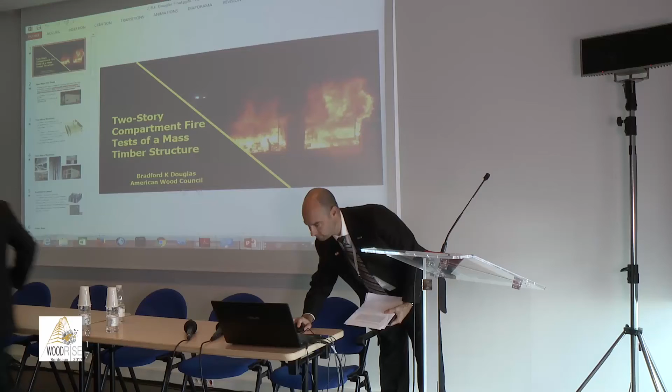So our next presenter will be Brad Douglas from the American Wood Council. Brad is Vice President of Engineering for the American Wood Council, which is the voice of North American wood products manufacturing, representing over 75% of the industry that employs over 400,000 men and women in the United States.

With more than 33 years of experience in the wood product industry, he directs a program aimed at developing state-of-the-art engineering data, technology and standards on structural wood products, systems, and assemblies for use by design professionals and building officials that assure safe and efficient wood-based designs.

He served on several standard development committees of organizations including ASTM, American Society of Civil Engineers, the U.S. Federal Emergency Management Agency Building Seismic Safety Council, and the International Code Council, addressing proper design of wood buildings for exposure to fire and structural loading, including wind and seismic loads.

Mr. Douglas was the 2015 recipient of the Award of Merit and title of Fellow from ASTM International Committee D07 on Wood, which is the highest organizational recognition for individual contribution to standards activity.

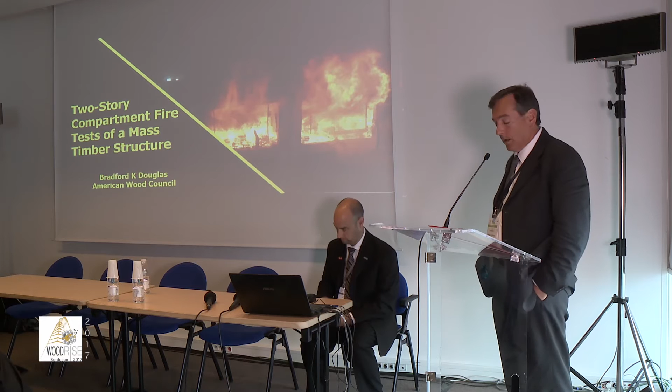So, Christian asked me to come and speak to you today about a study that we have been conducting. It's actually the second study of two full compartment test series that have been done in the United States. The study is in support of the tall wood activities in the United States.

Specifically, I think Jennifer addressed some of it this morning, the International Code Council's Tall Wood Ad Hoc Committee, which is a group of regulators, fire officials, material interests, engineers, architects, and designers who have come together to try to develop prescriptive code changes that will allow wood frame construction up to 18 stories.

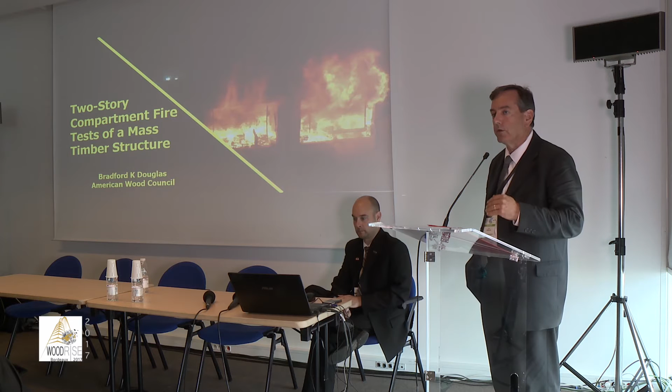And when I say wood frame, we're talking about heavy construction, what we have coined the term mass timber construction. So we're really talking about construction 7 stories and up.

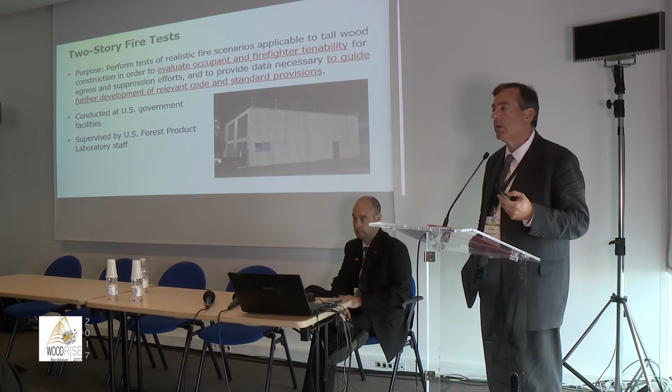The topic today is, as I said, the second series of compartment tests. They are based on a real fire scenario. We basically supplied the contents in an apartment size building, and met the requirements for a real fire scenario that has been identified in some of the standardization efforts in Europe and the United States.

The purpose of this test is a little different than the earlier series. The purpose of this test is really to evaluate the occupant and the firefighter tenability of the compartment during a real fire. Can they get out of the building? What is the timing? Does the fire grow and spread beyond the room and then the compartment of initial exposure?

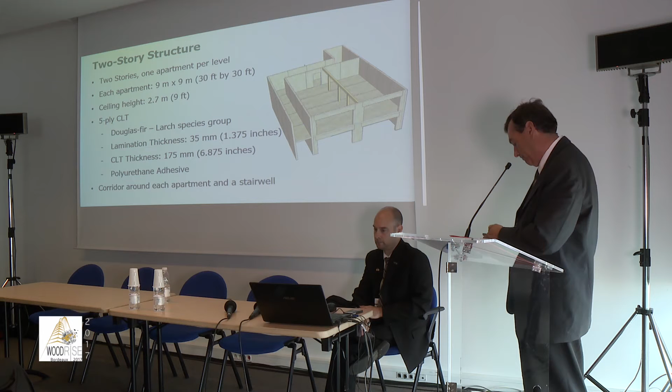So a quick description. This is a 2-story structure that was tested. It's basically, see if I can work this, it's basically identical top and bottom. This is the rough floor plan. It's a 30 by 30 foot, 9 by 9 meter space. It's separated with a load-bearing beam on both floors, CLT in the exterior perimeter, CLT floors and roof, then a non-rated partition in the middle.

The CLT was a 5-ply CLT, made of Douglas fir, 35 millimeter layers, 175 millimeter total thickness. Used a polyurethane adhesive, which is common in North America. And there was also a corridor constructed with CLT around the compartment, and there were measurements taken to determine what, if any, fire spread occurred in this corridor and then down. This is a stairwell here. I think I've got a little better picture of that in a minute.

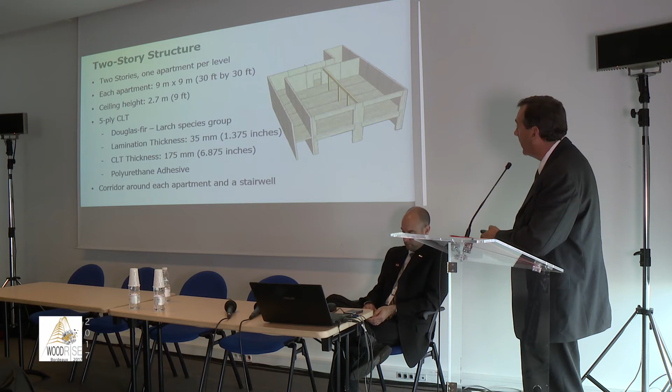There were several things that we noted in the early series of tests that we wanted to address in this series. One of them was the importance of sealing joints. We had quite a few problems in the original compartment test with not having the joints sealed. And so the contractors that put the building together did a very good job putting down joint sealing and intumescent caulk that allowed it to seal up, and we were able to use this facility for multiple tests.

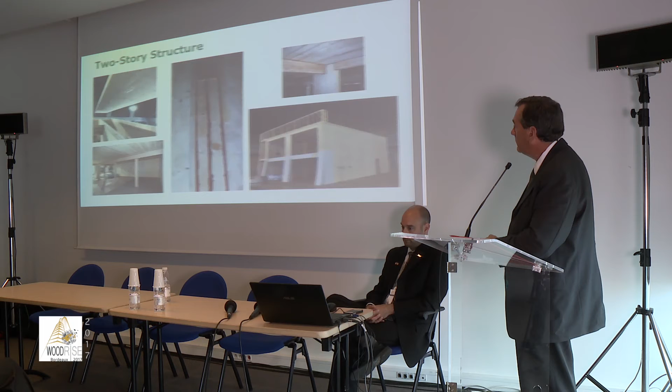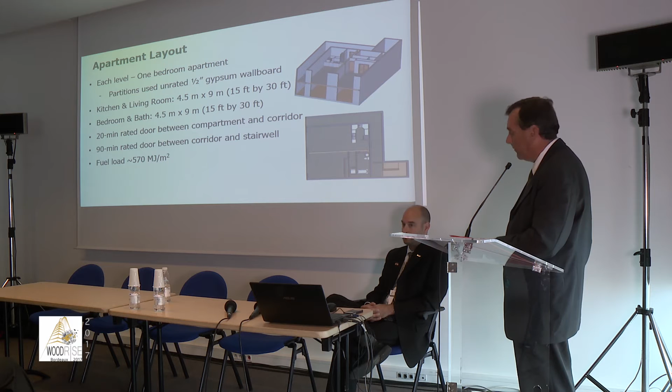This is another layout with the dimensions. The one thing I'll point out, this was a 20-minute door by code. Had to be rated for 20 minutes. This was a 1.5 hour rated door, 90-minute door, also required by code.

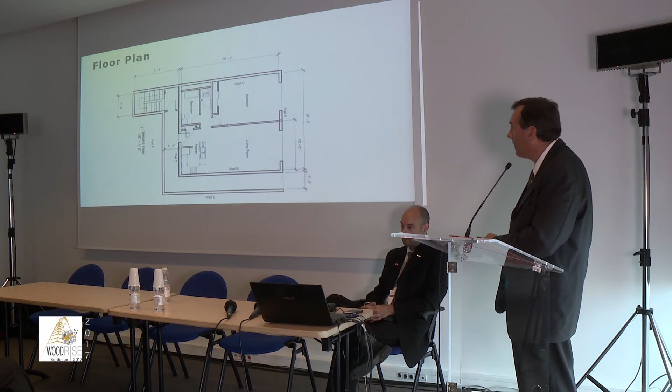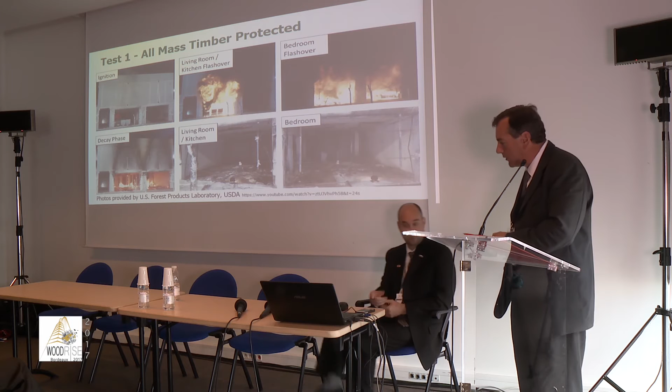So the first test was, again, the benchmark test that occurred on the first floor. And I've got a video here, if I can get Christian to start it for me. There's a lot going on in this video, but all of these cameras are linked, so it's all occurring at the same time from different camera locations. You'll notice down here in the bottom, they'll speed it up and slow it down so that we're not sitting here for the full 3 hours that this test was taken. But they've ignited the source back here in the kitchen.

The kitchen becomes involved and it moves into the living room. I believe we're fairly close to flashover in the living room there. So we've had flashover in the living room. It's now spread into the bedroom. You can see the fire here coming through the doorway. This door was left open just to accelerate the time in which the fire spreads into the bedroom. Mattress ignited, so we have flashover in the bedroom. Both rooms are fully involved at this point.

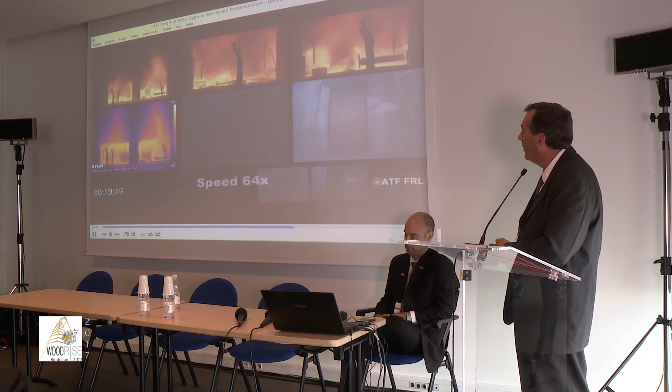I believe they speed it up here soon. There we go. You can see this is the doorway into the corridor, the 20-minute door. This door did very well in the first two tests. I'll discuss it a little bit later, but it lasted, I believe, more than 30 minutes. It was rated for 20 minutes. By the time the door finally was consumed, the fire had declined to the point where it really didn't expose the corridor to much fire. For that reason, the 90-minute door to the stairwell never really saw significant temperature rise.

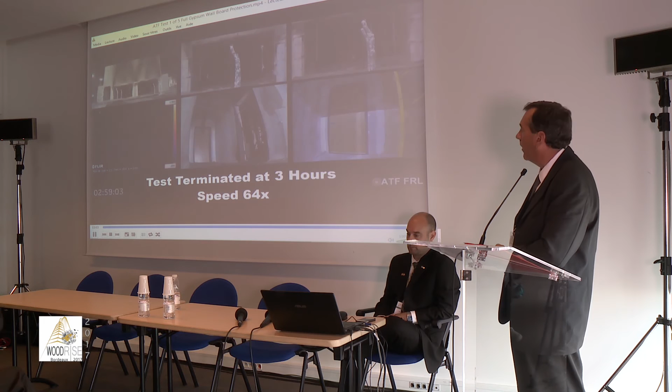The corridor door has passed. This test was terminated at 3 hours. We had intended to go to 4 hours, but we terminated it because, as you'll see in a minute, the curve just didn't really do anything.

For the sake of time, I have a video of all these tests. They're online if you're interested. Talk to me afterwards, and I can give you the links. But test 2 and 3 looked almost identical to test 1. Unless you had a stopwatch, you wouldn't be able to tell the difference because most of the fuel source is really the contents in the room.

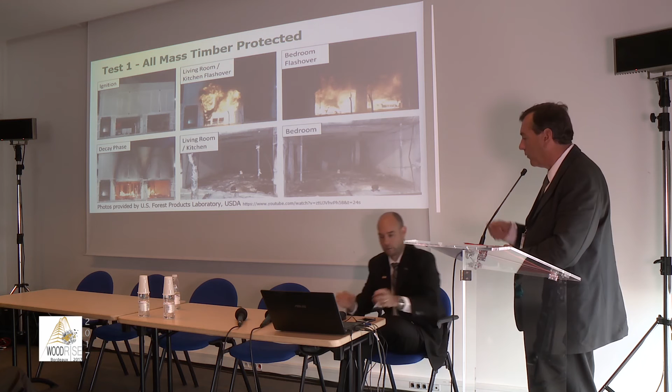I do have a video of test 4, which is the sprinkler, if you want to switch to that. Found that one very enlightening to me. We talk about the advantages of sprinklers, but until you actually see a real fire scenario with a sprinkler, it really doesn't drive it home. So they've ignited the room. They've stepped out. I don't think they sped this up because it happens pretty quickly. Looks like it's double speed here. So the fire is growing about like what we saw in test 1.

The smoke alarm has now triggered, and notification to the fire service would have occurred at this point. You see the flashing here in the room. Fire continues to grow. These sprinklers activate at about 140 degrees C, I believe. And they're activated there at 243, I believe it was. So all you see is steam now. And the fire's pretty much out at that point. So it never affected the bedroom, just started to fill the living room with smoke. I think we can stop that, Christian.

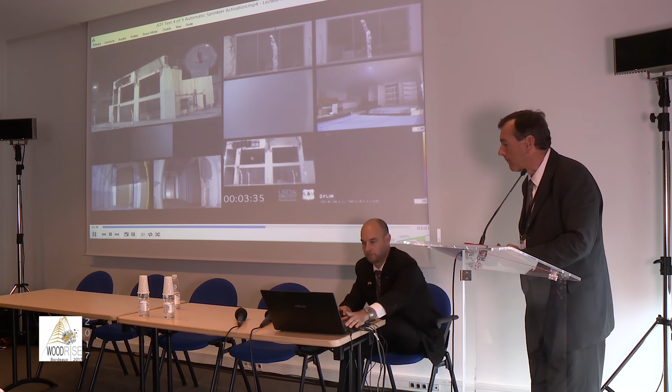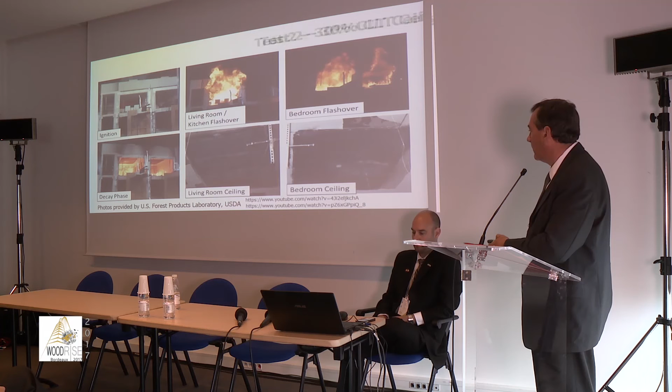Flames in the hallway, the first 2 tests performed about the same. The 3rd test failed very early at 13 minutes. The problem here was the door frame. They didn't have a 3rd door frame that fit exactly right, so they tried to modify the door frame to make it work. We didn't realize it until after the test, and we said, wow, this only lasted 13 minutes. Well, that's when the contractor admitted that he thought that using a different door frame would work, and it didn't. So that's an important lesson there.

The compartment door, in this case, failed completely at 29 minutes instead of close to an hour. Again, we didn't have sprinkler activation in the first 3 tests. We did have it at 2 minutes and 37 seconds, when it activated in test 4. And then in test 5, we activated it at 23 minutes, representing 20 minutes after the fire service would have been notified. And that test was pretty much the same result. It was extinguished. The fire had spread to the contents in both the living room and bedroom, but the sprinkler system was still able to control it.

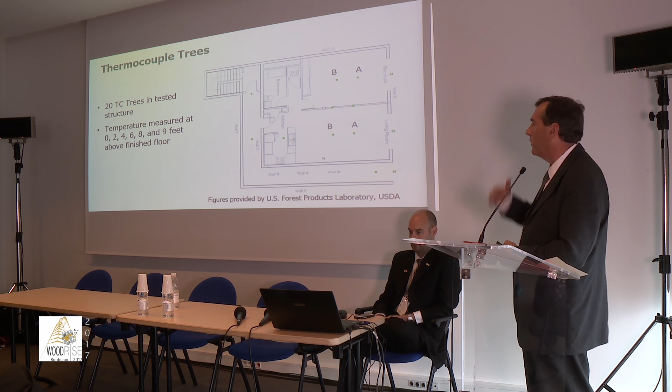And this is pretty busy, but this is test 1, 2 locations in the living room. This is test 2, where we had the ceiling exposed, and this is test 3, where we had the wall exposed. Test 2, very similar to test 1, although the scale, I noticed this morning, is off a little bit. This only went to 180 minutes. These tests, we terminated at 240, at 4 hours. So the scale is a little different, but you can see that both of these are cooled down below 100 degrees Celsius in the room.

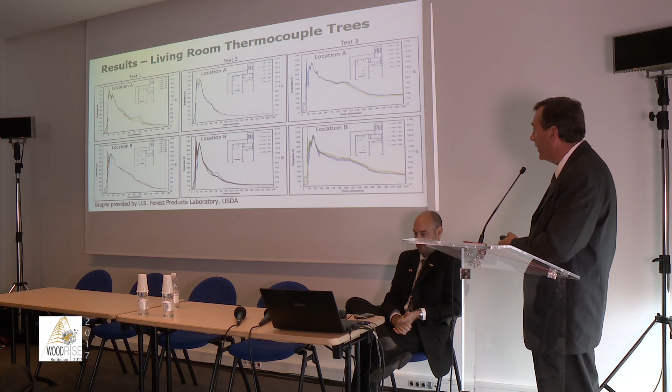The wall test, again, we terminated at 240. The temperature was still elevated. It was above 200 degrees Celsius. But there was not significant charring in the CLT walls. This is the thermocouples, surface and embedded thermocouples. What the researchers did was they embedded thermocouples in this wheel pattern at various depths, some of them at the glue line, some of them approximately halfway to the glue line, and then, if there was gypsum available, at the surface of each of the gypsum layers.

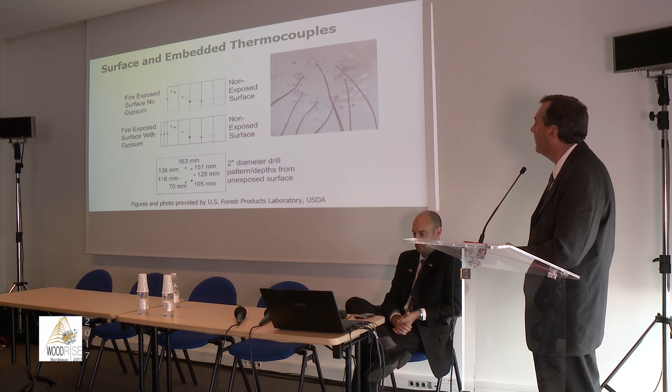This is a little more interesting, although again, pretty busy. In the fully protected, the CLT is cooling down very quickly, below 100 degrees. In the exposed floor, we did see some of the thermocouples still increasing. It took about 30 minutes for it to increase about 15 degrees C. And so the test was to be terminated at 4 hours. The researcher said there's not any change between 180 and 190. It was marginal, minimal. But we did hold it to 4 hours, and it had pretty much stopped.

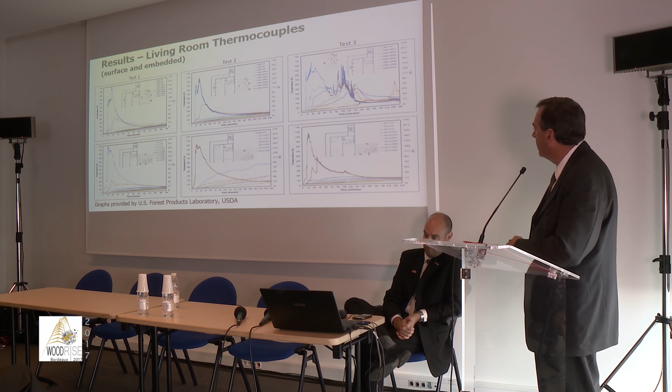The one thing was that we were getting right to the char temperature at the glue line. And that was at one location, so that's the one we're seeing right here. In the walls, it's a little more static here, but again, overall it was cooling down.

So just closing, all of this testing, the 400 streams of data are being analyzed, we've got the videos together. The U.S. Forest Products Lab was actually the researchers that worked with the people at the Alcohol, Tobacco, and Firearms laboratories to run the test in their full-scale area, and they will be publishing this in a general technical report sometime this fall, hopefully very soon, and it'll be at that website.